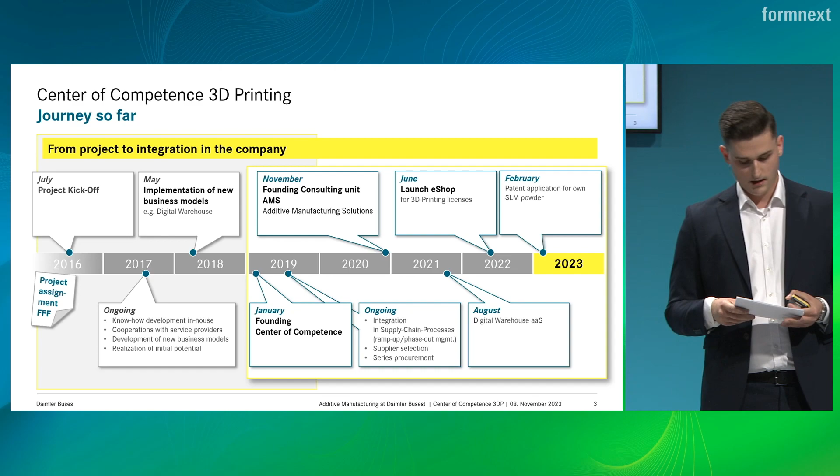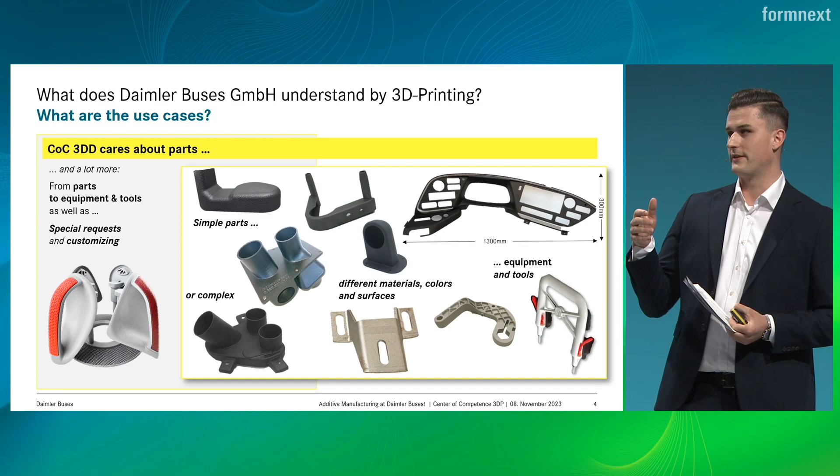Before we go into detail about the digital supply chain and digital rights management, what are the use cases for additive manufacturing at Daimler Truck and Daimler Buses? For us, 3D printing is more than just prototyping. We are convinced of industrialized 3D printing, ranging from small parts to complex materials and surfaces, to special projects where you need all of the aspects of the 3D printing world.

If you take a look at the slide, you can see some of the parts we have made, ranging from small covers to large cockpits that we've made for our series production when they suffered from heavy supply chain difficulties.

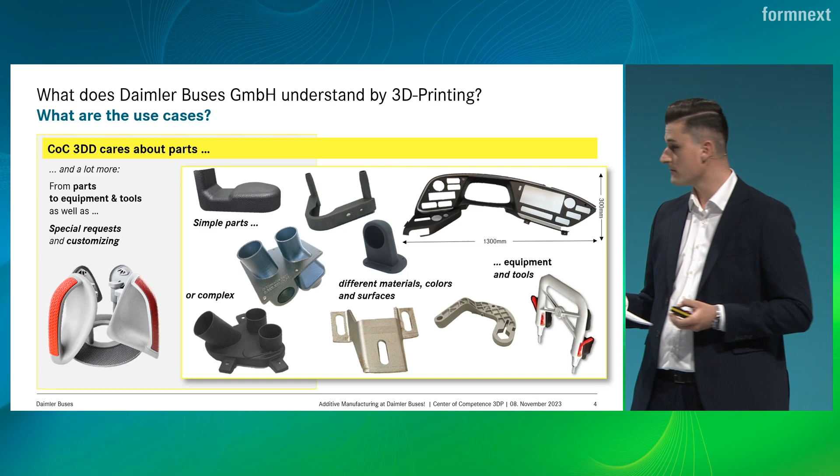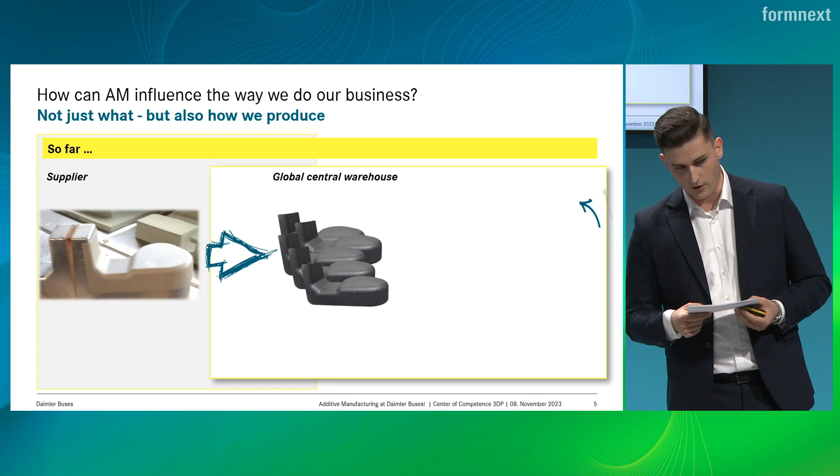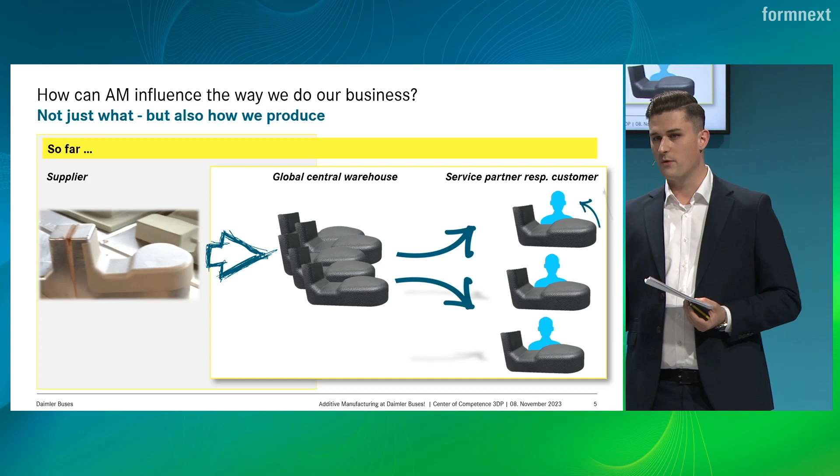So how did we manage to switch to a digital business model? What do we mean by that? The normal way for our truck and bus components has been that we have conventional suppliers who receive a 3D model from our development department and produce these parts. For these parts, they have to make a tool that costs a lot of money. Afterwards, these parts were transported to our global central warehouse where they were stored. And if a service provider, service partner, or customer needs the part, it will be transported to them.

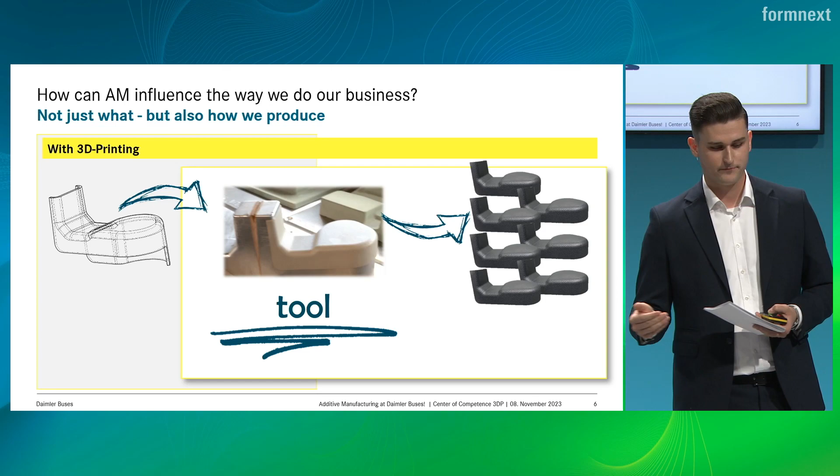With the help of 3D printing, we can use the 3D model and produce the exact same part as the conventional supplier. Unlike conventional manufacturing, we don't need to build or produce a tool for making the part - we can easily use the 3D model and a 3D printer to produce the part without any tool or tooling costs. So a 3D printer is possible to produce our parts without any tools and additional costs, only with the 3D model. This means a 3D printer is a general tool for all of our parts and can produce every other part in one step - the tool switches to the 3D printer and we can produce every other part.

That's how we learned that with additive manufacturing, every part can be produced at one time in one step, and with just one supplier, we can produce a wide range of truck and bus components from a single source.

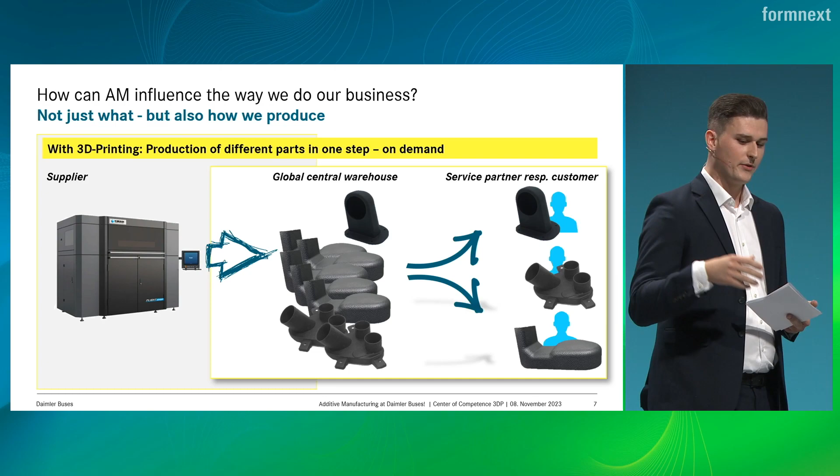The remaining steps stay the same. The parts were transported to a global central warehouse where they were stored, and if a service partner or customer needed a part, it would be transported to them. This made us think about the way we do our business.

So why don't we switch from a physical transportation or physical business model to a digital business model? A digital business model could help us reduce all of the physical production steps and the physical supply chain steps as well, including the transportation of the part, for example.

But at the core of a digital business model is data, which is the key element and sometimes also a bottleneck. Why? Data for additive manufactured parts needs to be prepared. In most cases, we need an optimized 3D model, we need the added part number, we need matched surfaces, and much more.

So that's the point. We have recognized the importance of data, and also that mismanagement of data could lead to another difficulty when using additive manufacturing in the industry.

The so-called digital twin, with an optimized 3D model in terms of surface and added part number of our truck and bus components, has been the basis for our digital warehouse, which was the response to the huge amount of data for additive manufactured parts at Daimler Trucks and Buses.

Instead of storing these parts in the global central warehouse in Germany, we can store these parts in our digital warehouse and prepare them simply for being printed on demand later on.

So now you've had a glimpse of our digital warehouse for additive manufactured parts. But what about our own parts?

We, Daimler Trucks and Buses, analyze and expand our service portfolio as well as our spare parts portfolio every day. As you may know, a truck or a bus contains a large number of components, so we're talking about more than 320,000 different part numbers, of which 40,000 are suitable for 3D printing.

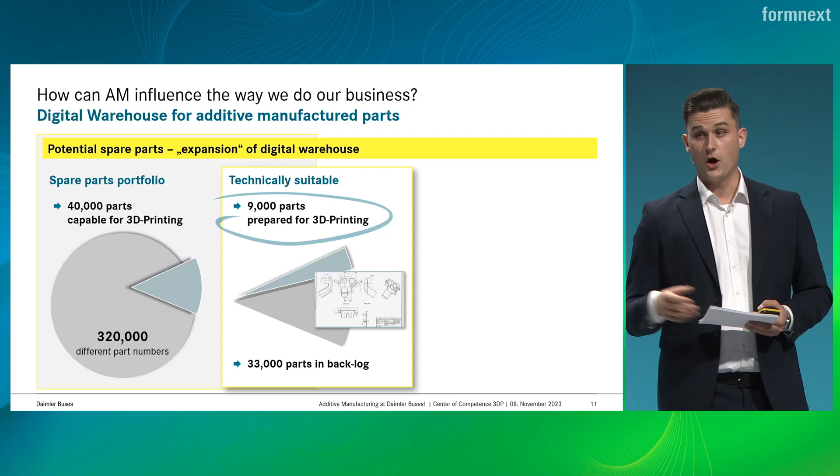Currently, 9,000 parts are prepared and technically suitable for 3D printing, and over 33,000 are in the backlog. Over time, we have implemented more than 2,000 different part numbers in our digital warehouse.

This also means that there's a high potential to increase the number even more in the digital warehouse, so that the parts can be printed on demand even more.

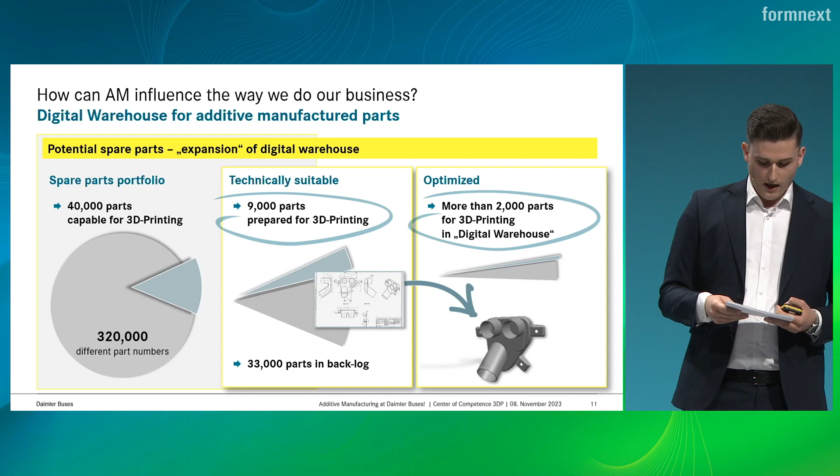As you already know, at the moment our digital warehouse contains around 2,000 different part numbers which are ready for 3D printing.

These 2,000 parts generate a high savings potential, as these parts are not stored physically in the central warehouse in Germany, so that we save a lot of tool costs and also the cost for the maintenance of the tools.

Furthermore, we can say that we can produce with our own printer the parts in our global central warehouse. So we can produce the parts in our own company, in-house in Germany, and therefore reduce the supply chain and deliver to the customer faster.

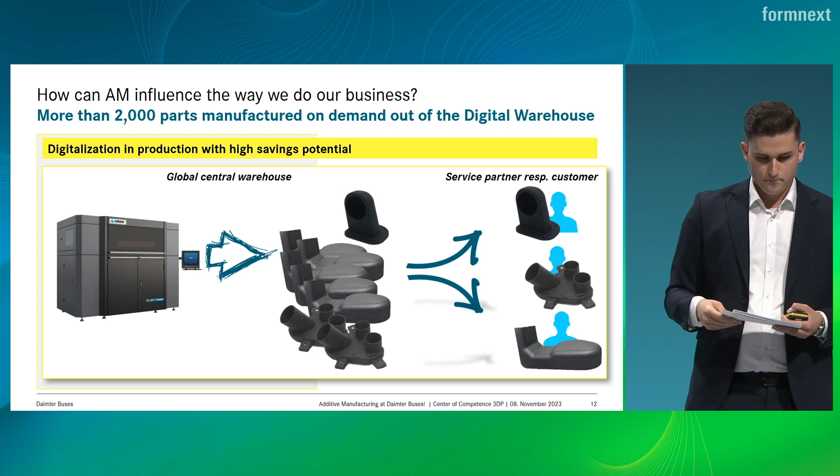Since the parts are ready for being printed and are not only printable in Germany in our global central warehouse, we can produce these parts decentrally. So the big idea was that each sales region would have its own 3D printer in the immediate vicinity.

So each truck or bus service center in the world could produce the parts itself and would not have to transport it from the global central warehouse to its own sales region.

The implementation of decentralized production, as I presented before, is part of our digital supply chain, which we realize through the sale of 3D printing licenses. So the big idea of selling printing licenses, of producing on demand, becomes reality.

We sell a printing license to a service partner, and the partner can print the part right directly on site and on demand. This results in a reduction of CO2 and also of long-distance transportation.

There are also positive effects on the cost side, as we generate savings in tolls, physical storage, and the transportation of the parts. But the most important question is, we are talking about the sale of printing licenses—how does it work? And is the sale of a printing license safe?

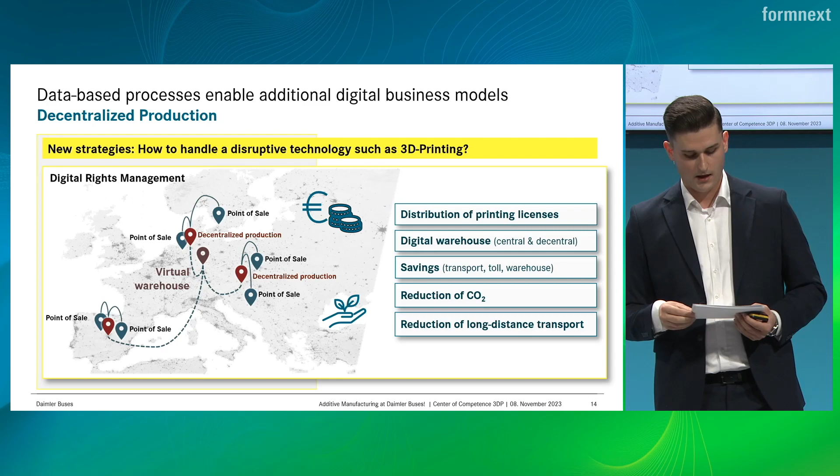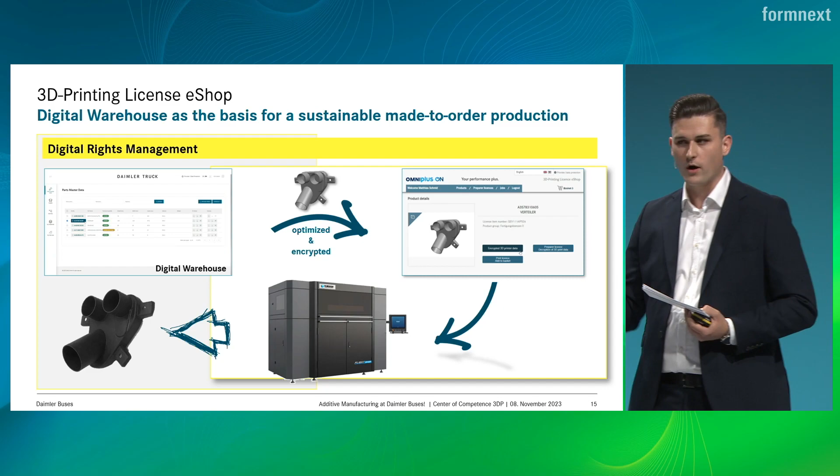Since it's often not enough to just put a 3D model into the printer and get a part, we provide a digital parts report for each printing license of a part, which contains all the relevant information of the part itself, as well as specific parameters for the print job. The digital twin as a 3D model, in combination with the digital parts report, are therefore the basis for our digital warehouse and 3D printing license shop.

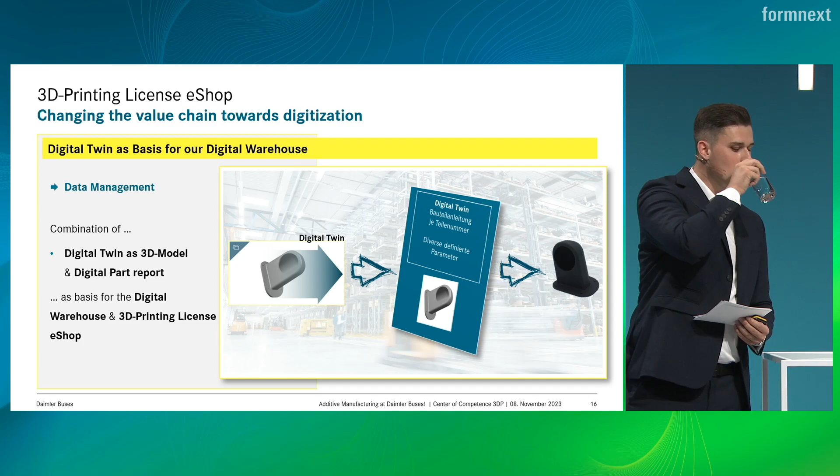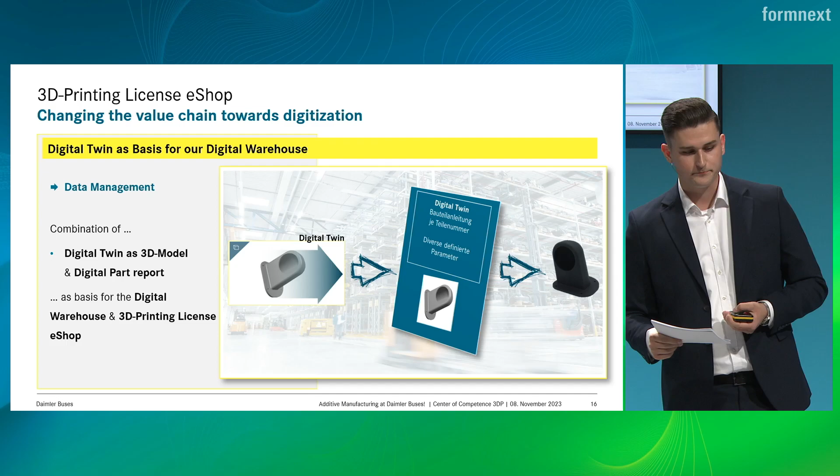So we learned about our digital warehouse and about the sale of 3D printing licenses. What about the topic of quality? The print license processing does not lower automotive quality standards, quite the opposite. All of the parts available in the digital warehouse have undergone an approved, certified process.

The decentralized production and license management are fully integrated into our ERP system with its own number sequence, so full traceability is given. For in-house production, the corresponding service provider must have the printers certified in advance by Daimler Buses. Our customers have the same warranty claims as for conventionally manufactured parts. In addition, Daimler Buses is fully liable for any damage caused by incorrect instructions regarding the 3D printing model or the data model.

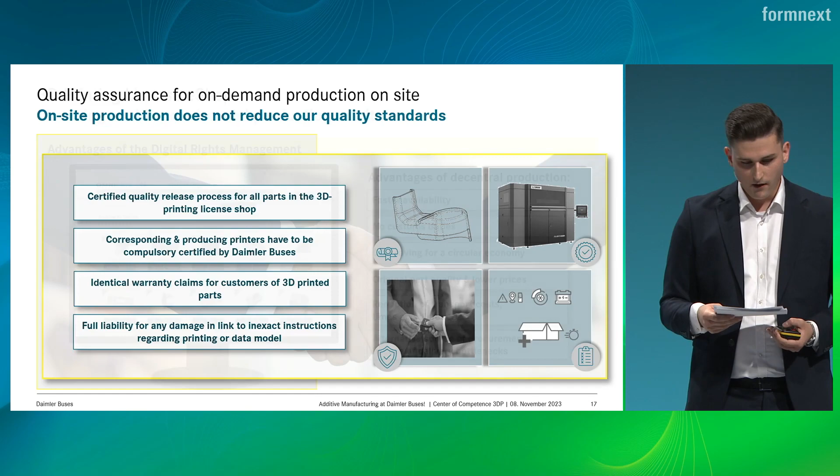So what are the advantages for us of digital rights management? The parts are available to the customer more quickly in terms of transportation times or distances, have original part quality, and lower prices. There are also advantages for us, as we can generate savings potential, or if we suffer from heavy supply chain difficulties, we can switch the procurement source. We can take the 3D printing license and print it at our partner's place.

So if we combine digital rights management and the general advantages of additive manufacturing, we can contribute to a circular economy and generate CO2 savings, which is a very important aspect, and as well in the automotive sector, a sensitive topic.

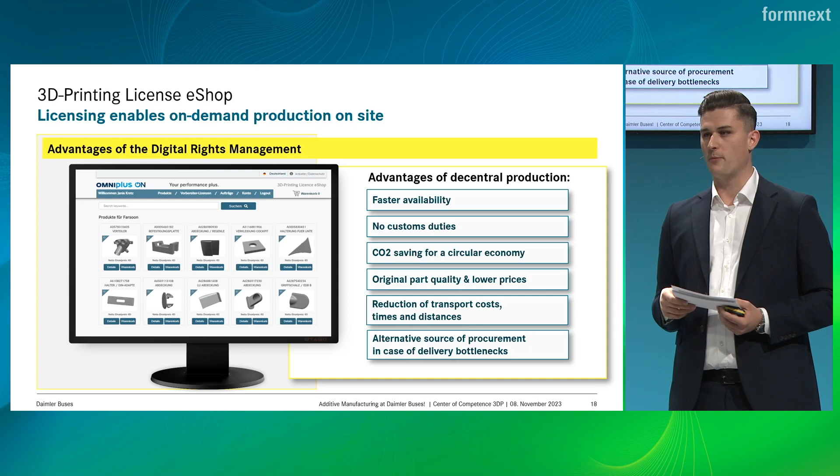Let us dive into the topic of CO2 and circular economy for a moment. What are the three main aspects for the carbon footprint of 3D printing? It's about the materials used in manufacturing the part, the manufacturing of the part itself, and the transportation of the part. For example, we have a supplier; the supplier brings it to our global center warehouse and then to the customer.

The benefits of manufacturing with a 3D printer can come into play as soon as we construct a new part and adapt an appropriate design for the additive process. So the adapted design of a new truck or bus component helps further showcase the benefits of additive manufacturing with a 3D printer. Only the material actually used to produce the part or object is used, so we can significantly reduce waste and increase efficiency.

This effect is further enhanced if we think about the implementation of recycled plastics or other sustainable materials, so we can contribute to the circular economy. The manufacturing process can also be decentralized, as we have learned from our digital warehouse, our total digital supply chain, and the digital rights management. This reduces energy consumption and CO2 normally associated with the transportation of the parts.